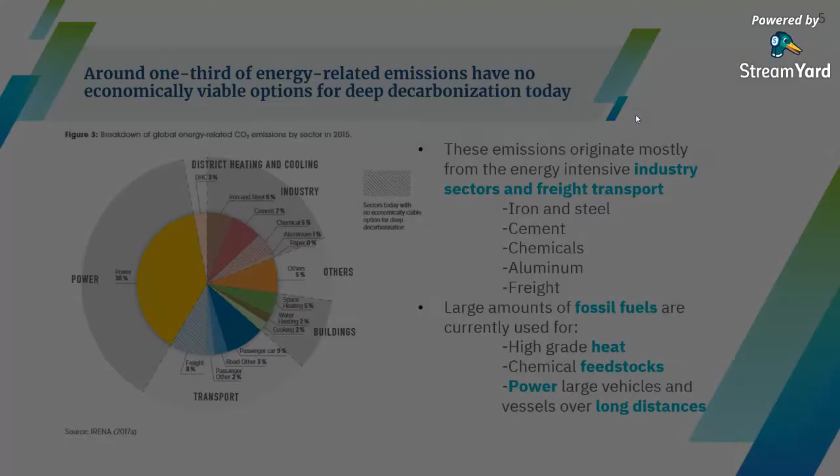Firstly, for the role of green hydrogen in decarbonization: we know that there are a lot of options to decarbonize different sectors in the economy. However, around one third of energy-related emissions have no economically viable options today. Some of these sectors include iron and steel, cement, chemicals, aluminum, and freight, which is transport over long distances. For these purposes, large amounts of fossil fuels are currently used to generate high-grade heat, and also for the chemical reactions that take place in some of these processes.

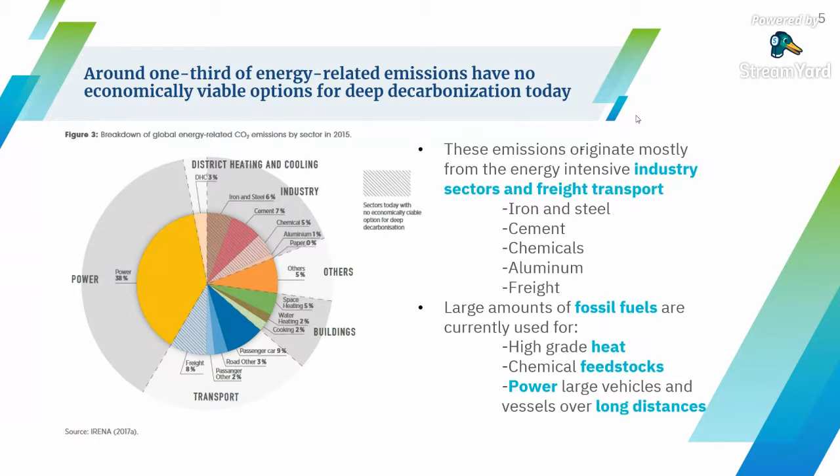Also, high-density fuel is needed to power large vehicles and vessels over long distances. So where does hydrogen come in?

Green hydrogen is a very flexible energy carrier that can enable the renewable energy system and decarbonize end uses. With the production of renewable electricity, it can be injected into an electrolyzer along with water and produce hydrogen, which can enable the integration of renewables into different sectors, for example buildings, power, industry, and transport, yielding a lot of opportunities for using hydrogen as a feedstock for heat production, and also as a chemical feedstock to decarbonize transportation by using it as a fuel, and to distribute it to other uses in buildings.

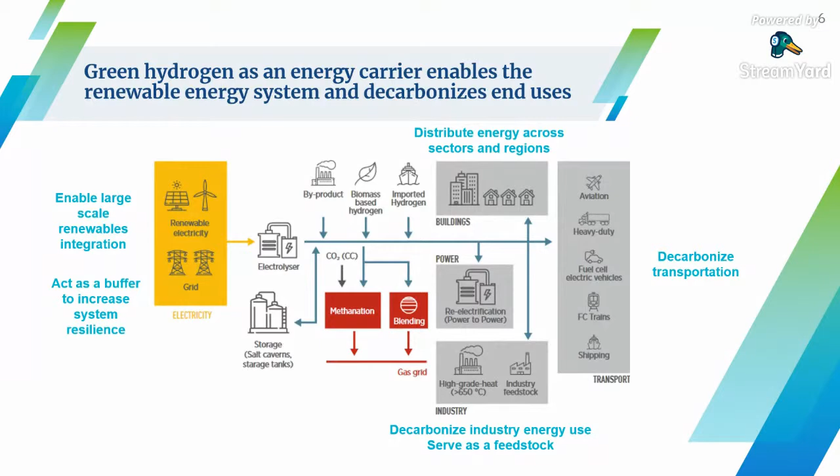So knowing this, how do we produce it and how do we convert it into other useful chemicals? For this, I want to introduce you to two key concepts: the hydrogen chain and the levelized cost of hydrogen.

First, the hydrogen chain. It's all of the different blocks and technologies that help us produce the hydrogen and carry it to the end users, and also convert it for further transportation or other end users. How do we measure the competitiveness of a particular hydrogen production chain?

It's by calculating the levelized cost of hydrogen, which consists of the sum of the discounted costs over the lifetime of the project. This is the capex and opex of all of the different technologies, divided over the sum of the discounted hydrogen production over the lifetime of the project - so this is how many tons, for example.

From this image it can seem a little complex, you can see that many types of chains are possible. What does this mean? For example, you could produce hydrogen by an electrolyzer using electricity and water and use it on site. Or you could produce it, compress it, store it, and take it in a pipe to an end user a few kilometers away, or even on the same site, or carry it by a truck. You could also transport it to a conversion facility, and then ship it over continents.

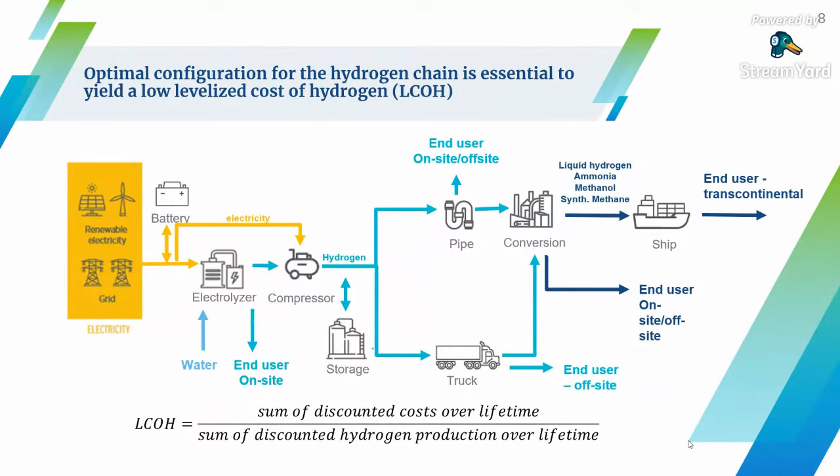The first component I want to discuss is the electrolyzer. The electrolyzer is the core technology for green hydrogen production. Two inputs are needed: water and electricity. Basically, the electrolyzer uses electricity to split the water into hydrogen and oxygen.

Two main technologies exist for this: alkaline and polymer electrolyte membrane. Their materials differ, and they also have other differences in terms of capex, efficiency, and the footprint of the system. But in general, the main parameters that influence the final levelized cost of hydrogen that I want to discuss today are four: the capex requirements, the conversion efficiency, the electricity costs, and the annual operating hours.

So the next two parameters I want to explain are a little more complex, but I hope you can pay attention to this part. The second two parameters are the utilization rate and the electricity costs. Higher utilization rates - meaning how many hours in a year an electrolyzer is producing hydrogen - have a very high influence, because they can help spread out the capex into more hours of the year, yielding lower costs.

But according to the different configurations that you could have, there is also an additional parameter, because you can see here from the curve that in the middle it's the lowest, and then as you advance, this becomes a little bit higher. Why is this?

Because if you really want to operate an electrolyzer every hour of the year, it means if it's grid connected, that you will have to buy more expensive electricity at certain points of the year.

And if you have a configuration based on renewables, as you can see in the figure on the right, at the middle you have the optimal utilization rate, because you have a good trade-off between the size of your equipment for PV or wind, for example, and battery. But as you advance and increase the utilization rate, the battery may become oversized, meaning your electricity injected into the electrolyzer becomes more expensive, and therefore your operating costs become more expensive, thus contributing to a higher LCOH.

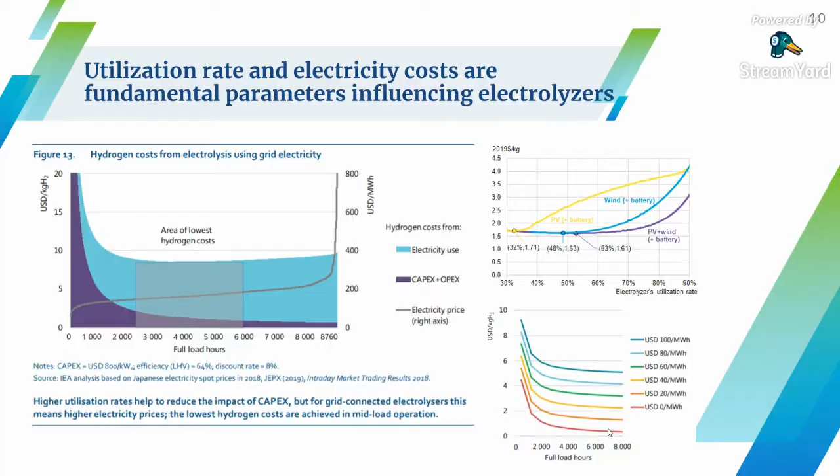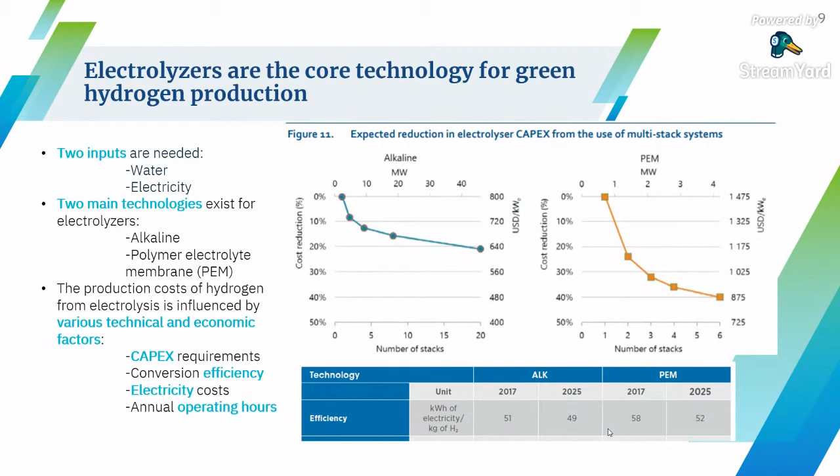So the key message here is that all of these are very important parameters that need to be taken into account. And there are sometimes certain trade-offs between one or other parameters that can lead to lower costs.

The second block that I wanted to discuss with you today is the storage technologies. Of course, at some point you will need to store the hydrogen before you transport it, or while you are going to use it at your industry or gas station, for example.

So here, pressurized containers are currently the most used technology, but there are other technologies that can help us store hydrogen at higher volumes, for example.

Some technologies such as liquid hydrogen, in which the gas hydrogen has to be liquefied, or you also have some other options which are based on geological formations, where you can store very large volumes, but they are not available everywhere geographically.

Another important point is to take into account what is the density that you can store in a certain storage technology, because some of them will have a smaller or a larger footprint, and in some cases this can be an important parameter.

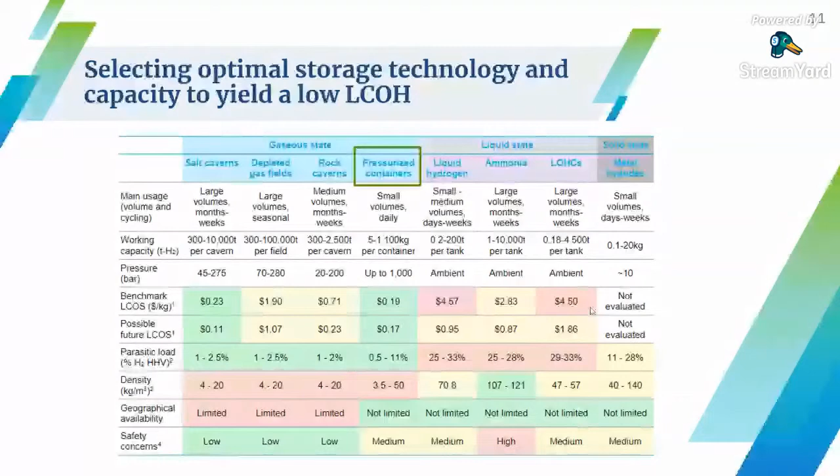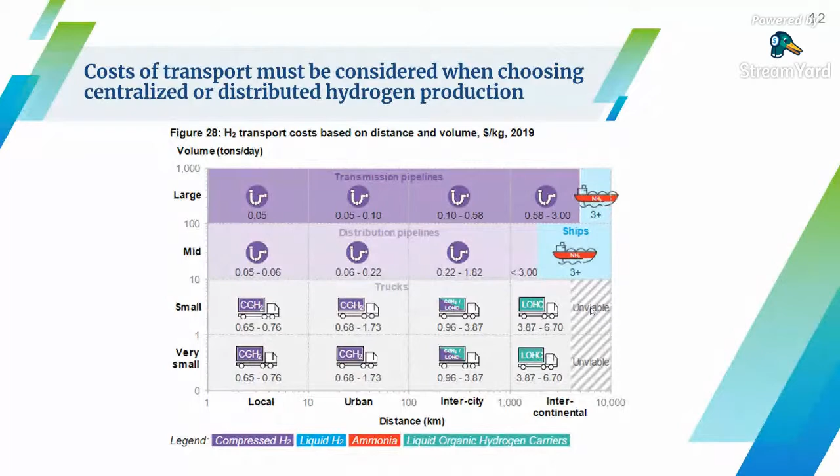And finally, the next block that I wanted to discuss with you today is the cost of transport. Because as we have discussed before, larger installations of electrolyzers for production yield a lower capex for the electrolyzer, so large-scale production is potentially cheaper.

So you need to distribute this across different distances at a local, urban, intercity, or even intercontinental distances at varying volumes. Maybe some users require a very small amount, and some of them require a very large amount. So how do you decide which one is the best technology for you?

You have to take these two parameters into account to decide what is the state in which you want to transport this hydrogen. It can be compressed, liquid, or you can transform it into ammonia or into a liquid organic hydrogen carrier, and transported through different means, for example, trucks or pipes, or even ships for intercontinental journeys.

You can see that all of these technologies and the different states in which hydrogen can be transported yield a very different cost in terms of dollars per kilogram, which are illustrated here. They can be very small, for example, for some transmission pipelines, or they can be very large for intercity compressed gas transport.

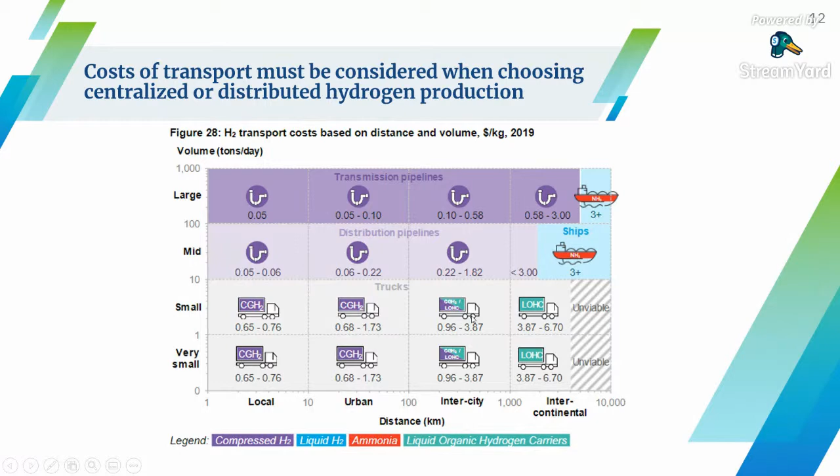So, knowing what are the main parameters that influence the levelized cost of hydrogen, what is the competitiveness and the outlook for this technology? First, I want to illustrate this by showing you what the levelized cost of hydrogen looks like for certain users and in certain locations.

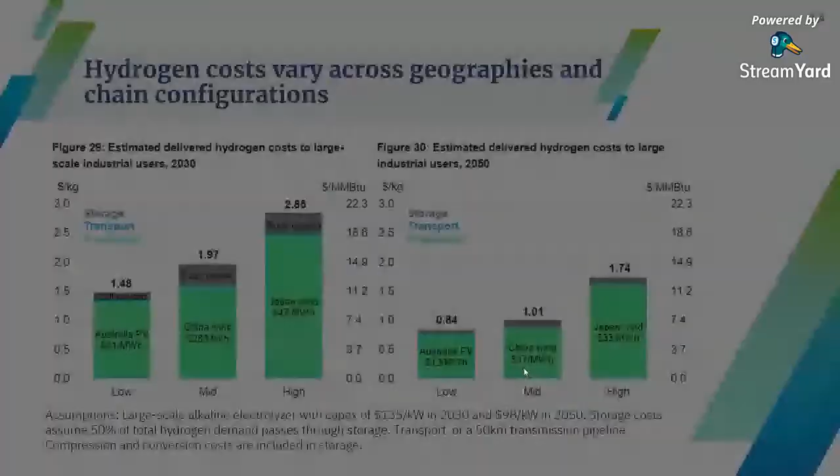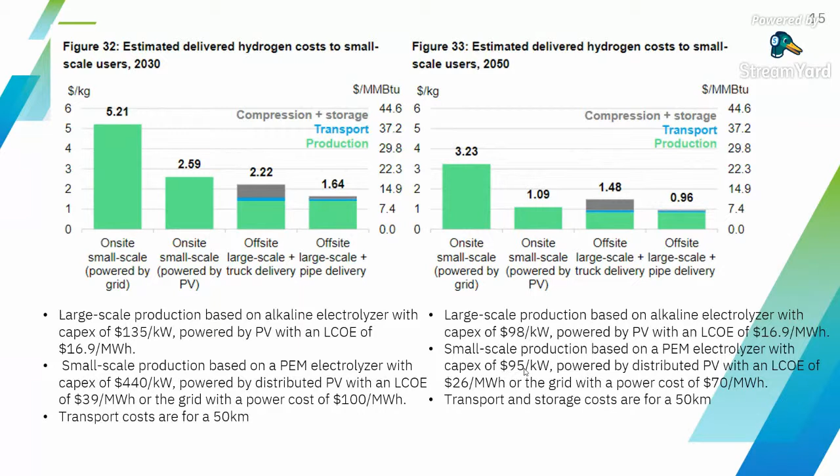Here, you can see that the different configurations of the hydrogen chain have an influence on the final costs. You can see that for an on-site small-scale installation, it can be quite more expensive than the installation of an off-site production with delivery by truck. It's a little bit less expensive than on-site, and for large-scale delivery with a pipe, it can be a lot cheaper. And similarly, as in the previous graph, the production costs will come lower with time.

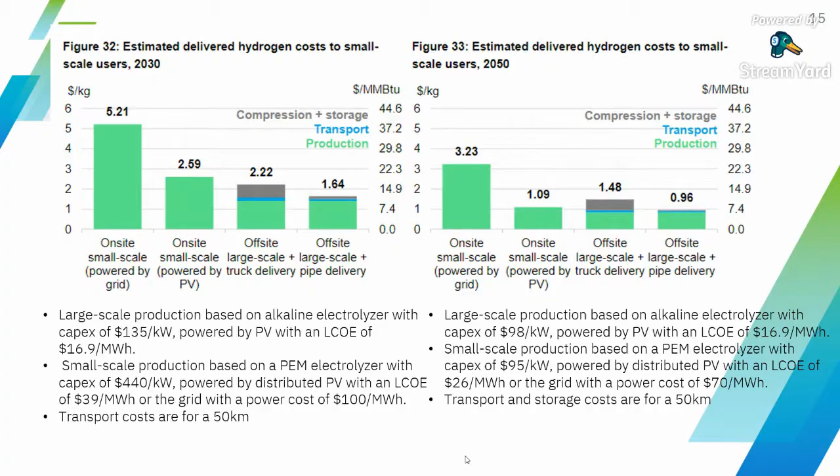So, taking this into account, how does this translate into competitiveness in certain industries? I want to share with you 2 cases of 2 industries that can be potentially interesting in the medium and long term. The first one is the utilization of hydrogen for steel production.

In steel production, you need to generate high-grade heat. Hydrogen can be combusted to generate this heat, and also used as a reactant in certain reactions. By 2030, green hydrogen can already be competitive with some of the higher range of costs of coal for generating this heat, and also of natural gas.

How can this competitiveness be further enhanced? Some sources, like Bloomberg, suggest a carbon price to achieve full competitiveness.

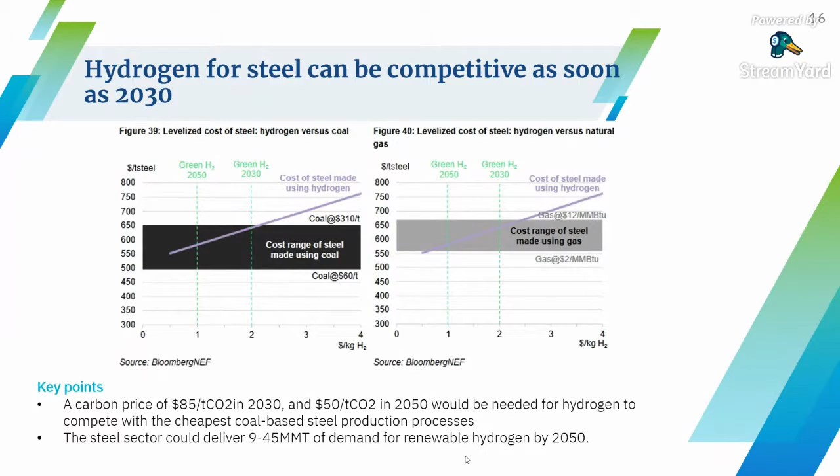Next, the next sector that I wanted to show you is ammonia. Why is ammonia important? Because it's a feedstock for the production of fertilizers. And hydrogen can be used here as one of the feedstocks for the reaction called ammonia synthesis.

In this case, we can see that we can achieve competitiveness by year 2030 with natural gas, with the difference that hydrogen will have more stable prices compared to natural gas, which is a market with very fluctuating costs. So it can provide some security to the producers about the cost of their feedstock.

Similarly, a carbon price is suggested to achieve full competitiveness.

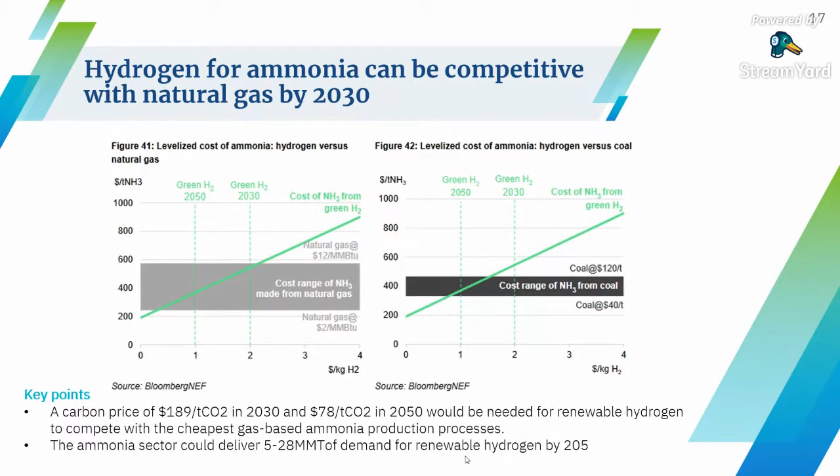Finally, I wanted to show you some of the success stories that we already have today. We can see that there are already some case studies, demonstrations, and even some industrial applications across different sectors.

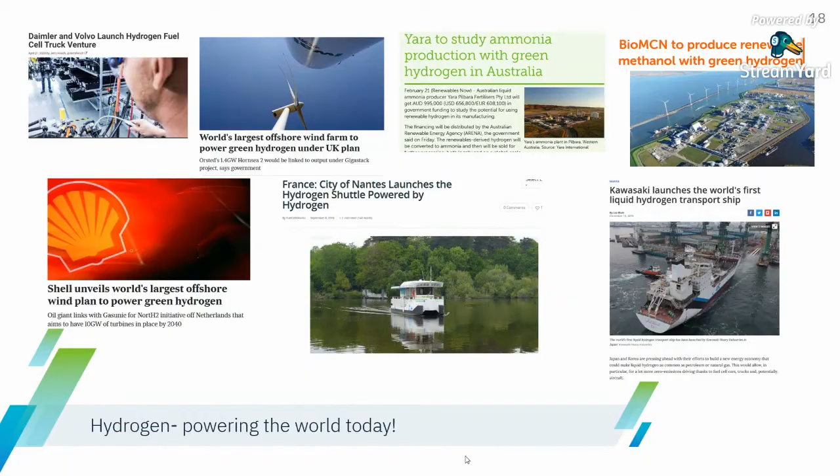As for the key takeaways, the things that I would really like you to keep in mind from this presentation, if you remember nothing else, please remember this.

First, that scaling up hydrogen production is key to unlocking a low LCOH, because large installations yield a lower CapEx for electrolyzers. But other trade-offs between storage, transport costs, and electricity are still important.

In terms of the configuration of the hydrogen chain, there is no one-size-fits-all solution. Multiple configurations are possible, and every step needs to be taken into account when reaching a final decision.

Finally, hydrogen has the potential to decarbonize sectors and integrate renewables into some very hard-to-abate sectors, such as ammonia and steel making, and others in other sectors that we will discuss in our next session as well, such as hydrogen mobility.

Finally, multiple demonstrations are already in place worldwide.

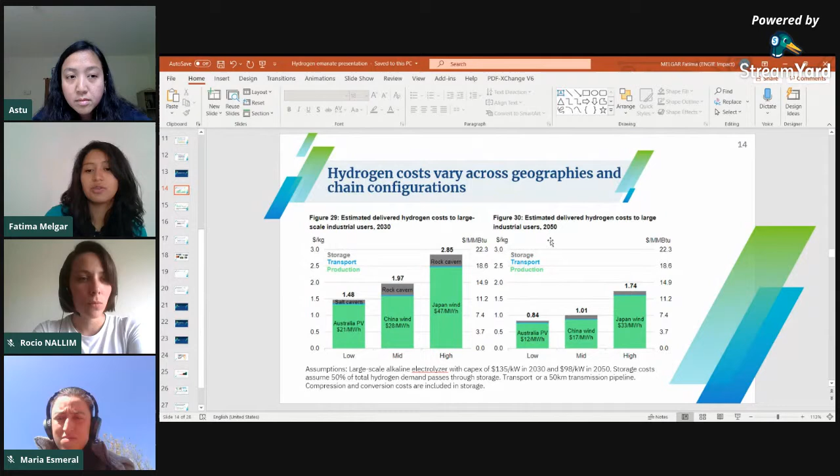It can also depend on the technological advancement when we relate it to the time horizon. And when referring to the scale, you can see that the cost can increase with decreasing scale by a factor even of 2, as you can see here, and also with the configuration of the whole chain. For on-site or off-site production, the transportation costs can also contribute. So I would say the answer is a very large range of variability.

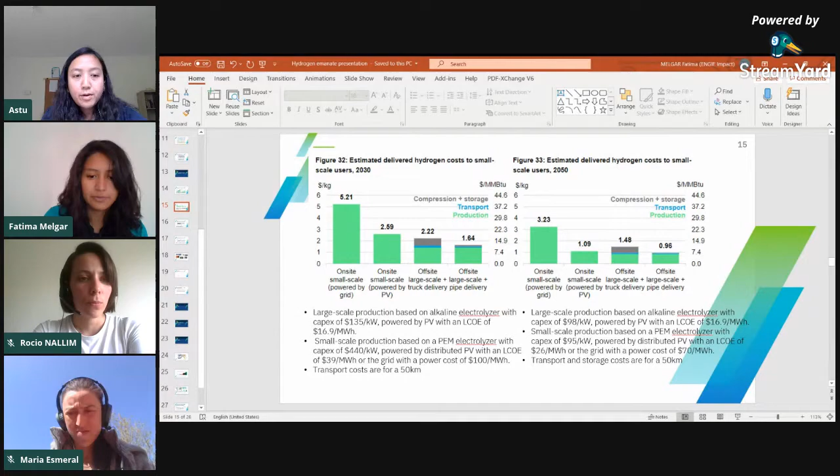Okay, thank you for the answer. And then the next question we're going to take again from YouTube.

So this is a question from Louise. Based on the results, it looks like a lot of the cost reductions come from centralized energy sources, but the future of renewable energy is decentralized. Is there any strategy for this that you know of?

In terms of the strategy, I think that is probably something I cannot discuss in this forum. But of course it is important for large companies like Engie, Total, or EDF, who have been traditionally linked to gas production, to potentiate green hydrogen as a fuel of the future.

In terms of decentralized production, I would say it's a little bit difficult to say, because as you could see, there are different configurations that are possible, on-site and off-site. So you would have to consider the costs along the whole chain to think about whether you need a decentralized or a centralized energy source.